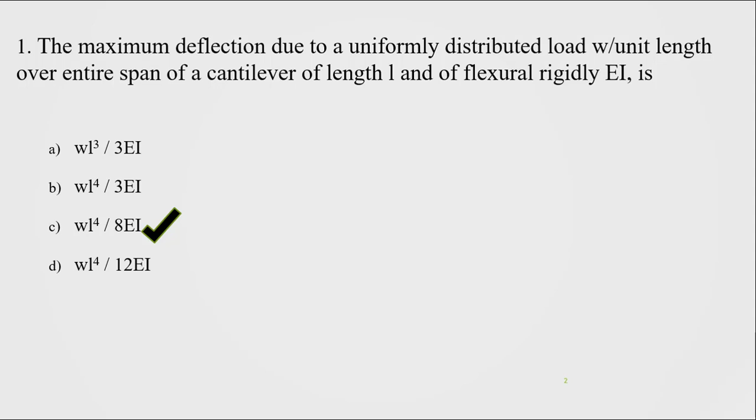Question number 2. At any point, angle made by tangent drawn to the deflection shape of a beam with horizontal is called dash at that point. Option A deflection, option B slope, option C both deflection and slope, option D none of these. The right answer is slope.

Question number 3. What is the unit of slope? Option A meter, option B centimeter, option C radian or degree, option D none of these. The right answer is radian or degree.

Question number 4. At any point, vertical distance between the axis of original beam and the axis of deflected beam is known as dash at that point. Option A deflection, option B slope, option C both deflection and slope, option D none of these. The right answer is deflection.

Question number 5. At the free end of cantilever beam, deflection is option A maximum, option B minimum, option C 0, option D none of these. The right answer is maximum. Question number 6. At the free end of cantilever beam, slope is option A maximum, option B minimum, option C 0, option D none of these. The right answer is maximum.

Question number 7. A cantilever beam of span L carrying point load W at free end, slope at free end will be option A WL raised to 3 by 3 EI, option B WL square by 2 EI, option C WL raised to 3 divided by 6 EI, option D WL raised to 4 by 8 EI. The right answer is WL raised to 2 divided by 2 EI.

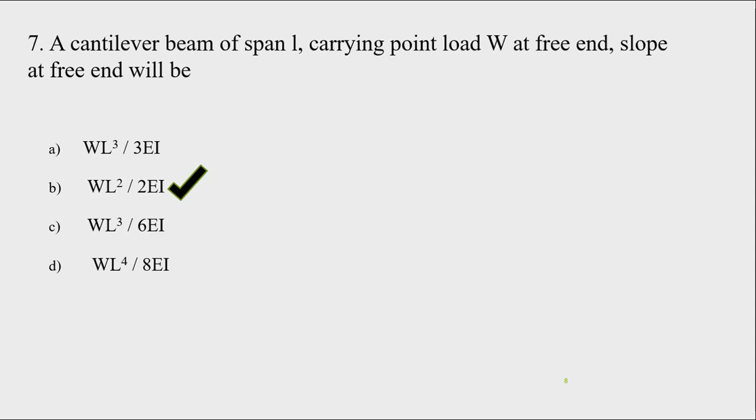Question number 8. Simply supported beam with 4-meter span is subjected to a point load of 24 kN at center. Find maximum slope and deflection of the beam. Take E is equal to 2.4 into 10 raised to 4 Newton per mm square and I is equal to 4.8 into 10 raised to 8 mm raised to 4. Option A 0.022 radian, 3.25 mm. Option B 0.0020 radian, 2.78 mm. Option C 0.0054 radian, 4.12 mm. Option D 0.0012 radian, 5.54 mm.

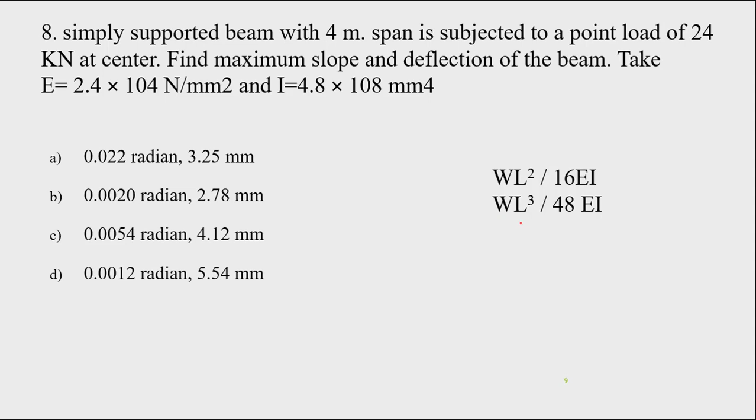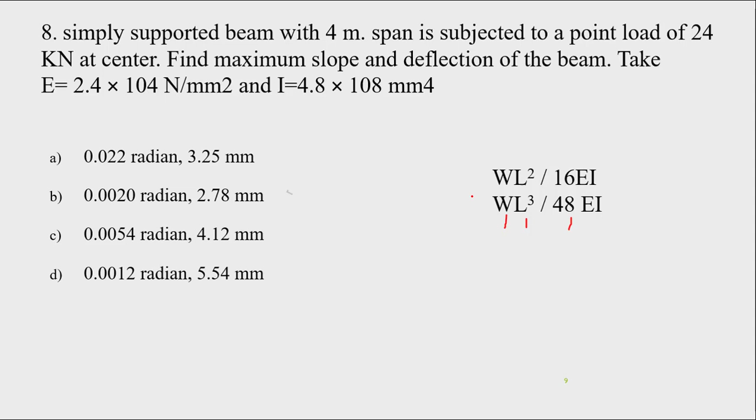Question number 9. Calculate maximum deflection for a cantilever beam of a span 4 meter subjected to point load of 23 kN at free end of a span. Take E is equal to 2 into 10 raised to 5 Newton per mm square. I is equal to 6 into 10 raised to 7 mm raised to 4.

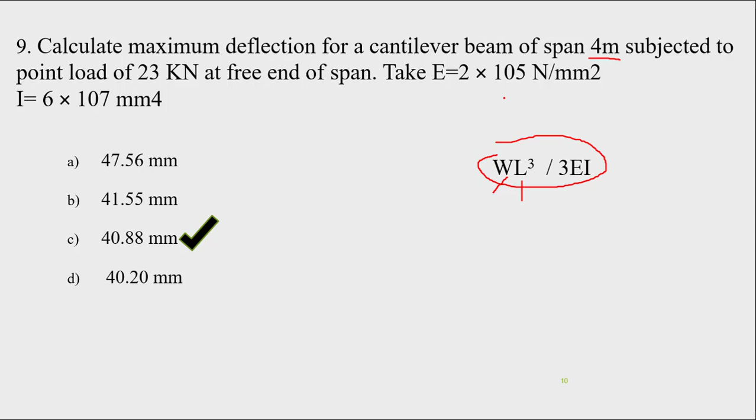EI की भी वैल्यू आपके पास गिवन है। Question number 10. The product of modulus of elasticity and moment of inertia is called as option A polar moment, option B flexural rigidity, option C stiffness, option D modulus of rigidity. The right answer is flexural rigidity.

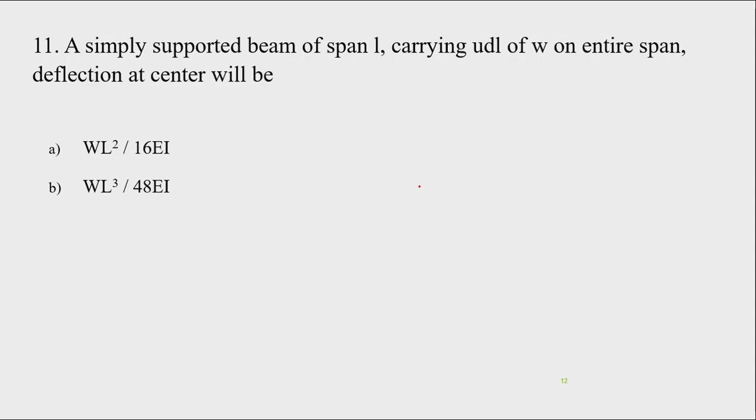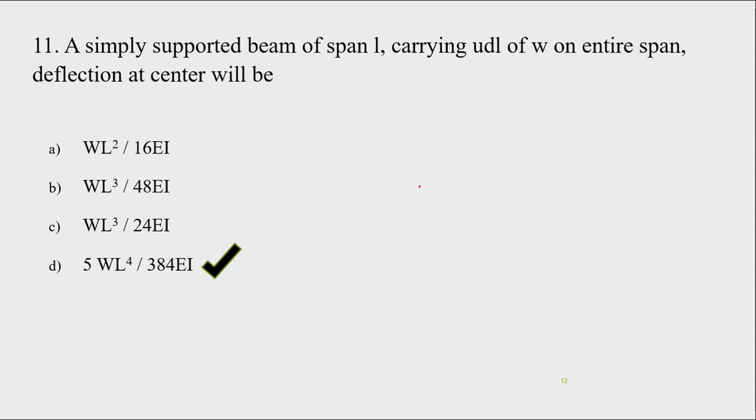Question number 11. A simply supported beam of span L carrying UDL of W on entire span, deflection at center will be: option A WL²/16EI, option B WL³/48EI, option C WL³/24EI, option D 5WL⁴/384EI. The right answer is 5WL⁴/384EI.

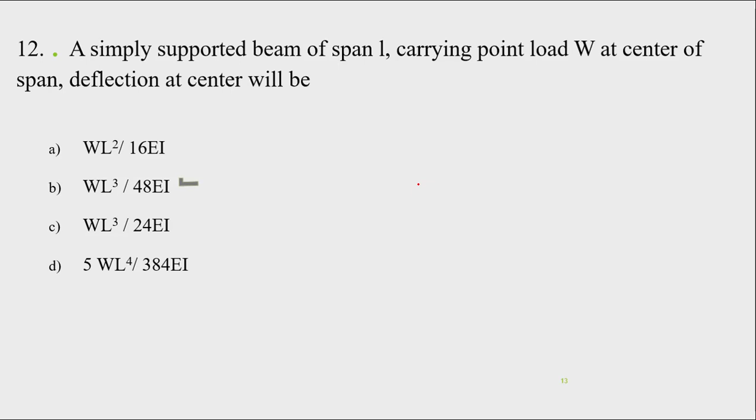Question number 12. A simply supported beam of span L carrying point load W at center of span, deflection at center will be: option A WL²/16EI, option B WL³/48EI, option C WL³/24EI, option D 5WL⁴/384EI. The right answer is WL³/48EI.

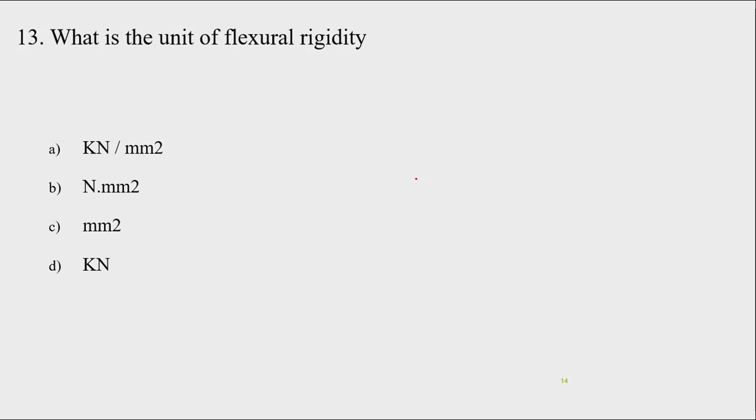Question number 13. What is the unit of flexural rigidity? Option A kilonewton per mm square, option B Newton mm square, option C mm square, option D kilonewton. The right answer is Newton mm square.

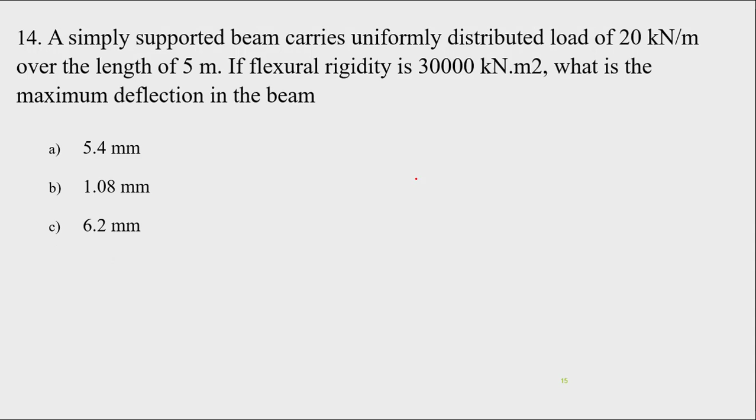Question number 14. A simply supported beam carries uniformly distributed load of 20 kN per meter over the length of 5 meter. If flexural rigidity is 30,000 kN m square, what is the maximum deflection of the beam? Option A 5.4 mm, option B 1.08 mm, option C 6.2 mm, option D 8.6 mm.

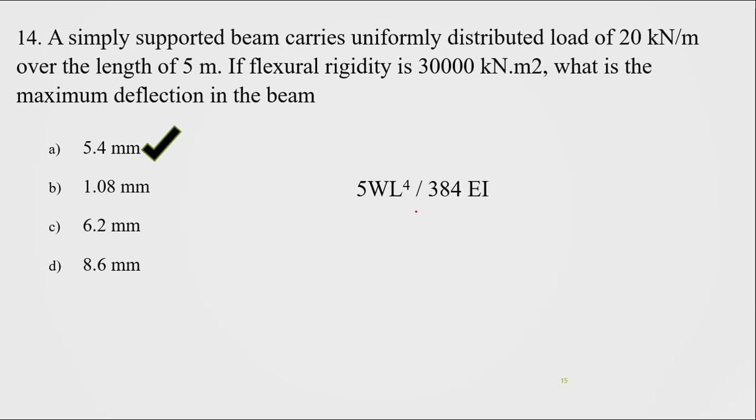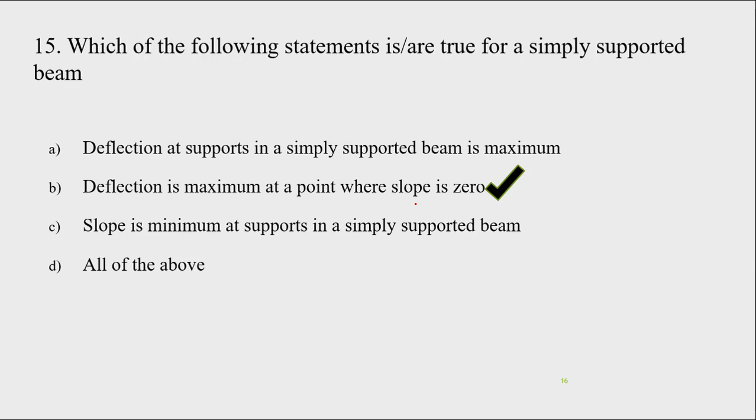Question number 15. Which of the following statements is/are true for a simply supported beam? Option A: deflection at support in a simply supported beam is maximum. Option B: deflection is maximum at point where slope is 0. Option C: slope is minimum at support in a simply supported beam. Option D: all of the above. The right answer is deflection is maximum at point where slope is 0.

Question number 16. The vertical distance between the axis of the beam before and after loading at a point is called as option A deformation, option B deflection, option C slope, option D none of the above. The right answer is deflection.

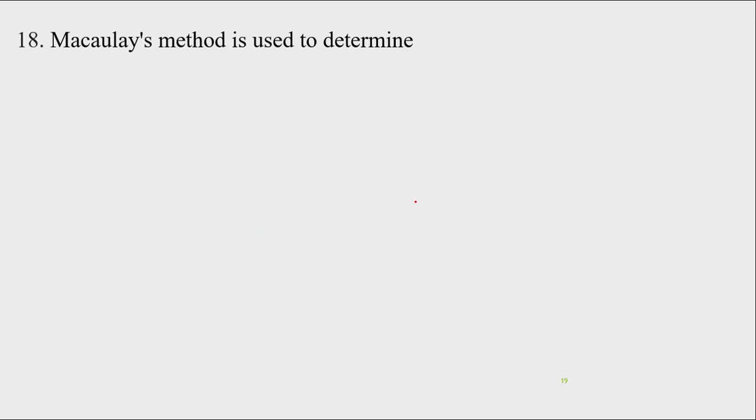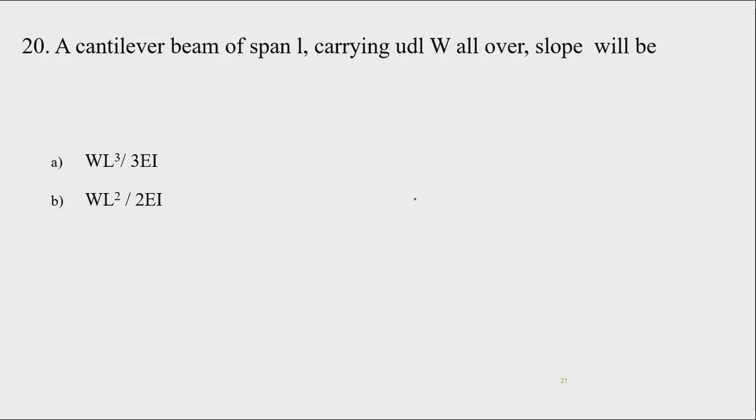Question number 20. A cantilever beam of span L carrying UDL W all over, slope will be: option A WL³/3EI, option B WL²/2EI, option C WL³/6EI, option D WL⁴/8EI. The right answer is WL³/6EI.

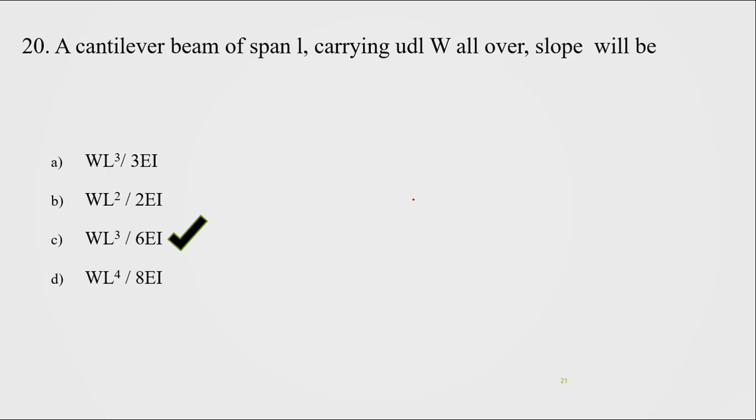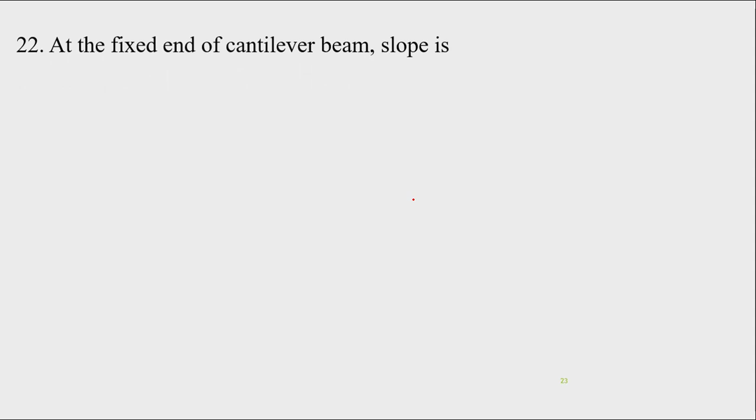Question number 21. At the fixed end of cantilever beam, deflection is option A maximum, option B minimum, option C 0, option D none of the above. The right answer is 0. Question number 22. At the fixed end of cantilever beam, slope is option A maximum, option B minimum, option C 0, option D none of these. The right answer is 0.

Question number 23. When value of EI is more, then deflection of beam is option A more, option B equal, option C less, option D none of the above. The right answer is less.